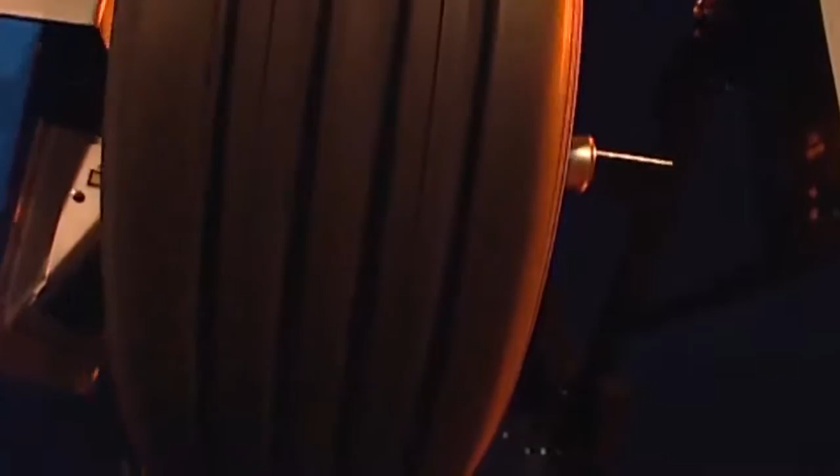A wheel balancer measures and corrects unbalance, but not runout of the wheels. This is what may be behind runout: runout of the rim, runout of the tyre, and/or runout of the tyre-rim assembly. The consequence? The car is far from running smoothly. Tyres wear out much faster. Driving safety might well be jeopardized, particularly when braking or cornering.

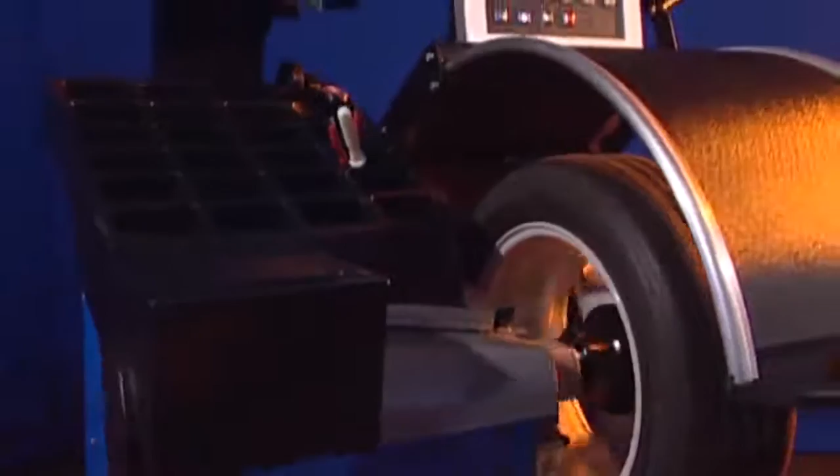The HOFMANN GEODYNA Optima is much more than a mere fully automatic wheel balancer. It is a diagnostic device with non-touch laser technology that is extremely convenient to operate. Alongside the standard features of unbalance measurement, the GEODYNA Optima also measures and corrects tyre and rim runout. Clamp the wheel on, close the wheel guard. That is all there is to it.

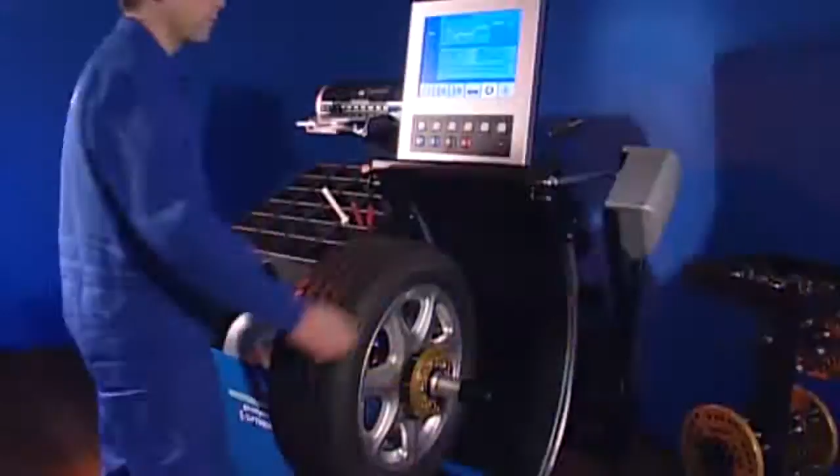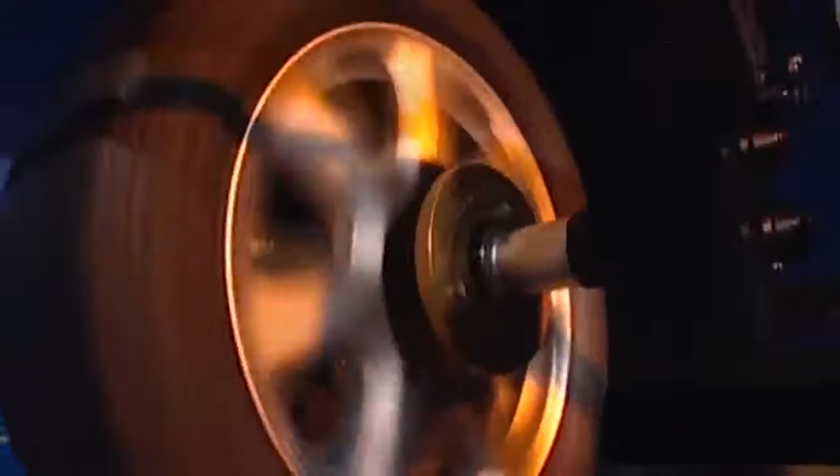All data, such as wheel dimensions, lateral and radial runout, number and position of spokes, and unbalance, are measured without the wheel having to be touched. The GEODYNA Optima increases productivity of the garage because it combines various work steps and consequently saves time. It adds to the professionalism and competence of the garage by diagnosing and remedying the ride problems of the car. Simply unique. GEODYNA Optima.

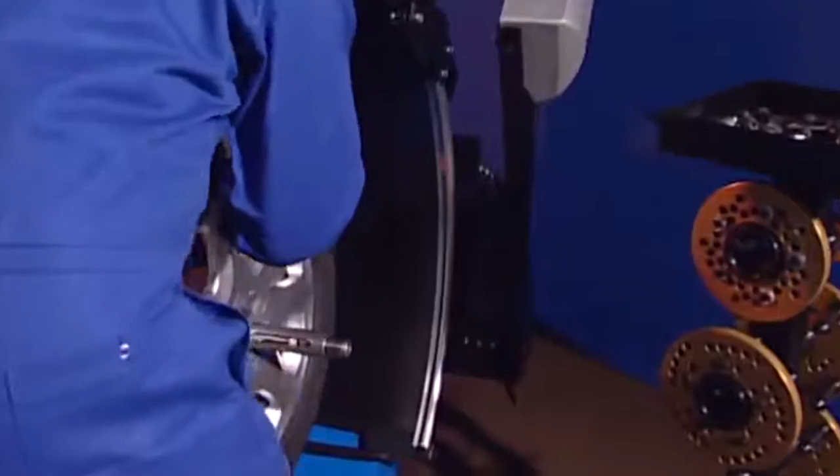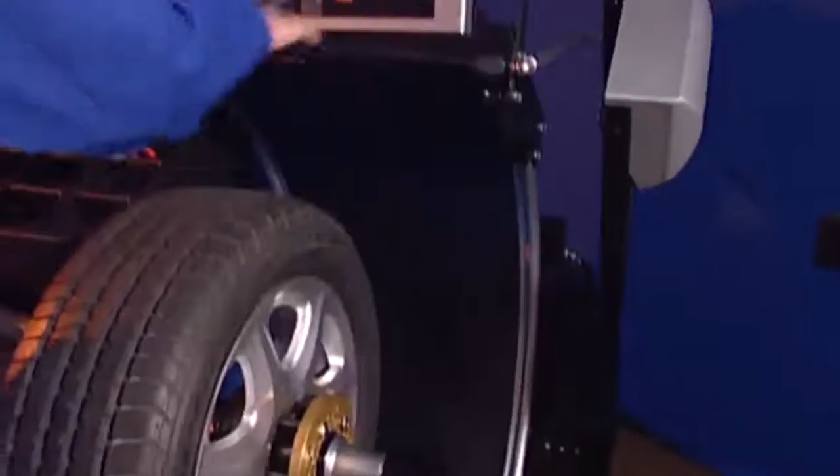The wheel is clamped onto the wheel balancer with the patented power clamp device, using a cone and a stud hole flange. The great benefit here is that the wheel is clamped on with maximum precision, an absolute must for any balancing operation. There are no more input errors, due to the fact that manual input of weight placement and wheel dimensions is a thing of the past.

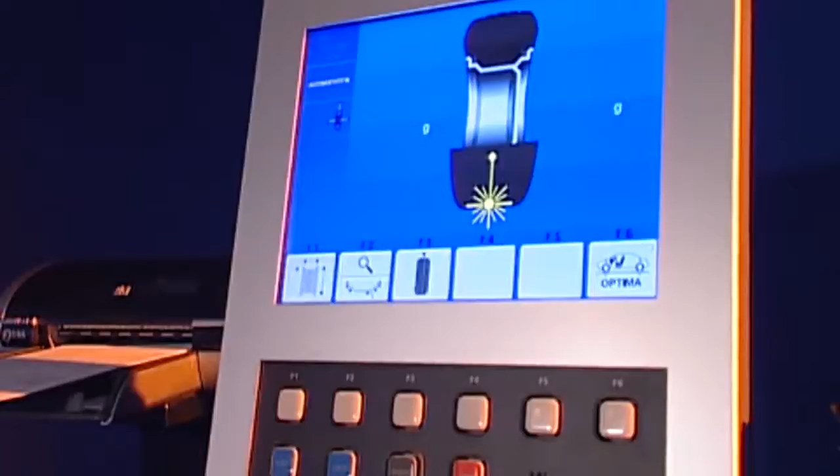The laser scanner first scans the inner rim contour with utmost precision to determine the offset, wheel diameter and weight position. Then it detects the position and the number of spokes. Afterwards, the wheel width is measured with a scan of the outer rim contour. Now the wheel data are complete. Finally, the rear scanner determines radial runout of the tyre-rim assembly.

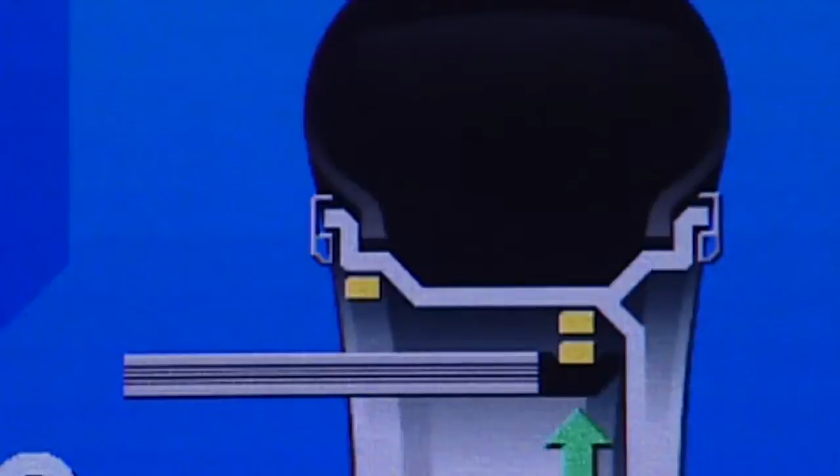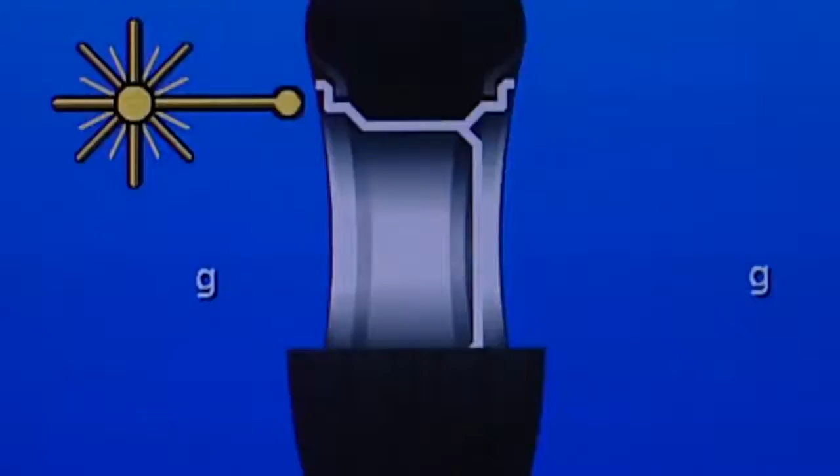If there is no indication of runout, the GEODYNA Optima will switch over automatically to the balancing screen. This enables the unbalance detected to be corrected. If, however, the preset threshold value for radial runout of the tyre-rim assembly has been exceeded, GEODYNA Optima becomes a diagnostic device. It automatically measures radial and lateral runout of the rim, clearly determining the cause of runout. This is what GEODYNA Optima alone can offer.

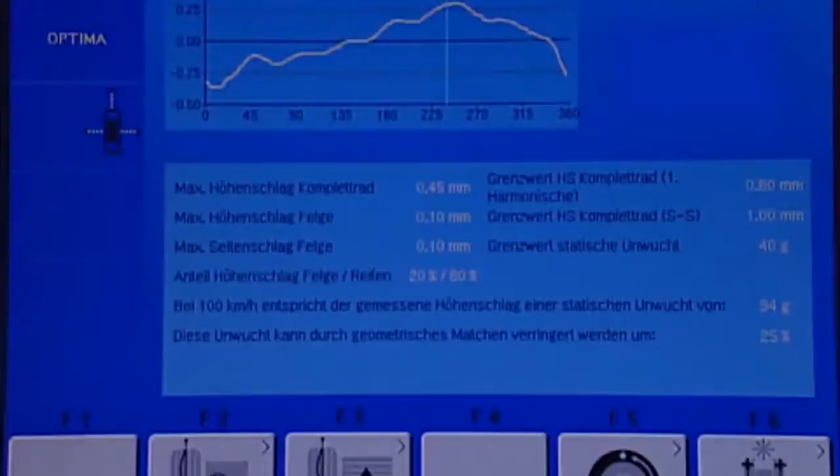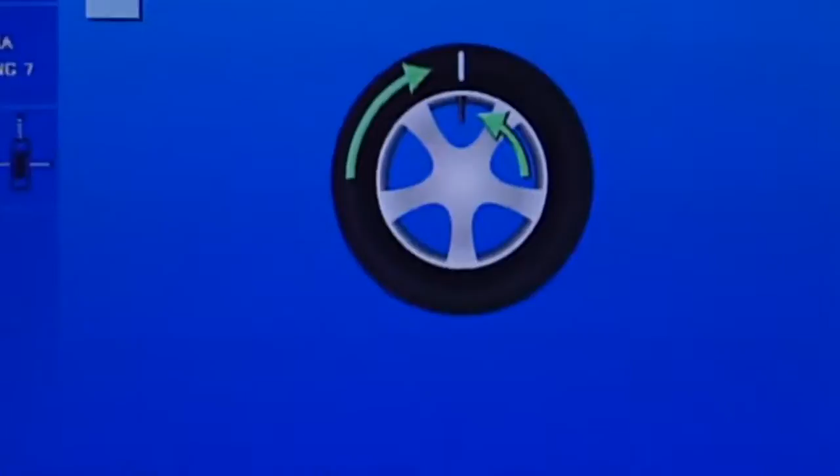Coming on automatically, here is the Optima screen with the graphics of radial runout and the radial runout values for the wheel and rim. Any improvement to ride is shown as a percentage. The operator is guided step by step through the easily understandable matching procedure, where the tyre is readjusted relative to the rim to compensate for runout and consequently to improve ride.

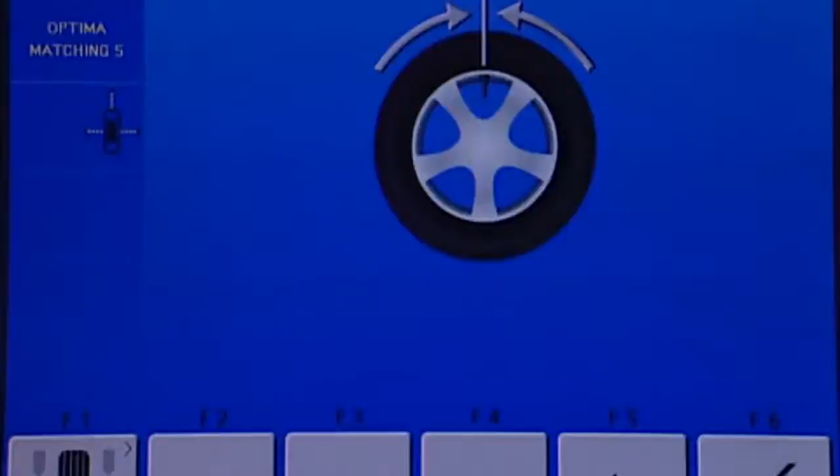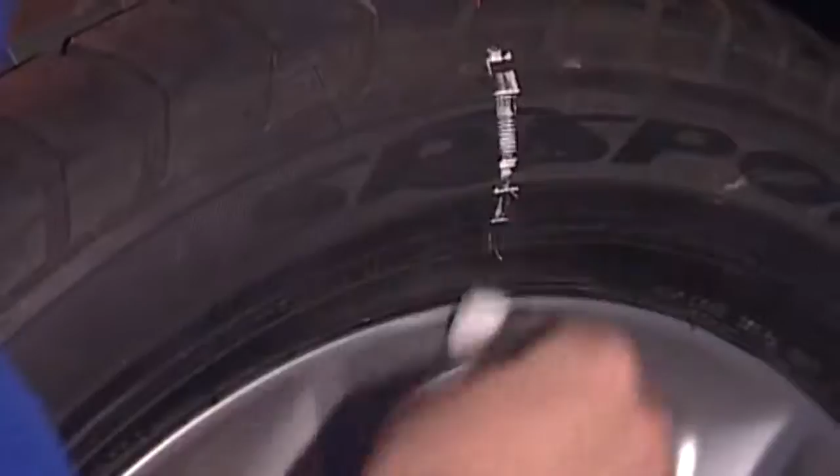First, turn the wheel valve to the 12 o'clock position and store this position by a simple key operation. Then rotate the wheel until the red arrows on the screen turn green and mark this position on the tyre with chalk in the 12 o'clock position. Now unclamp the wheel and on a tyre changer, turn the chalk mark on the tyre until it is level with the wheel valve. Now tyre and rim are optimally positioned to each other.

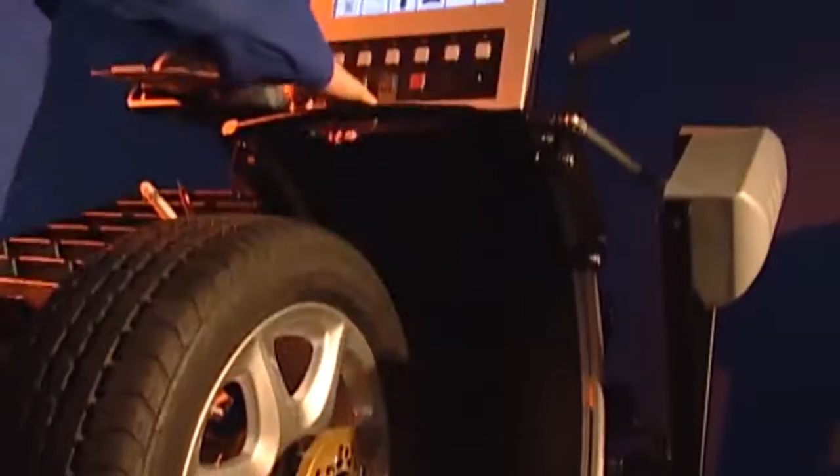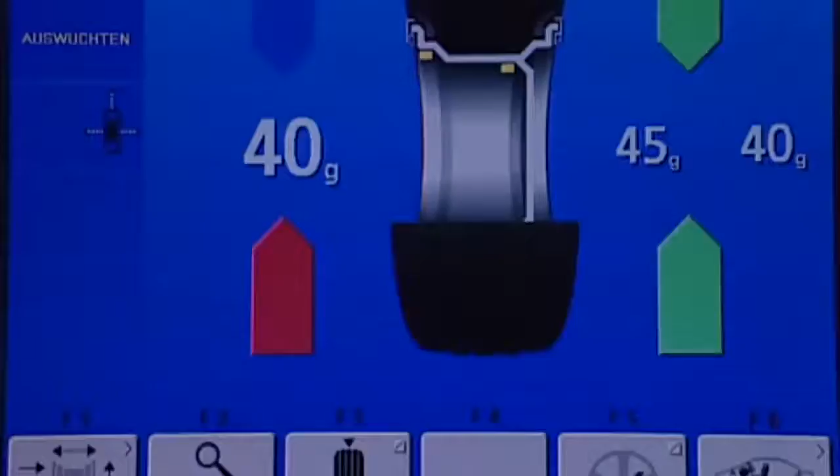The wheel is once again clamped onto the GEODYNA Optima. In a final measuring run, the unbalance is measured and corrected. Alloy rims mostly have spokes, so that adhesive weights may be visible from the outside. To avoid this, a simple key operation enables the weights to be divided up so that they can be positioned behind the spokes. In other words, one single key operation is sufficient to take care of this once complicated procedure.

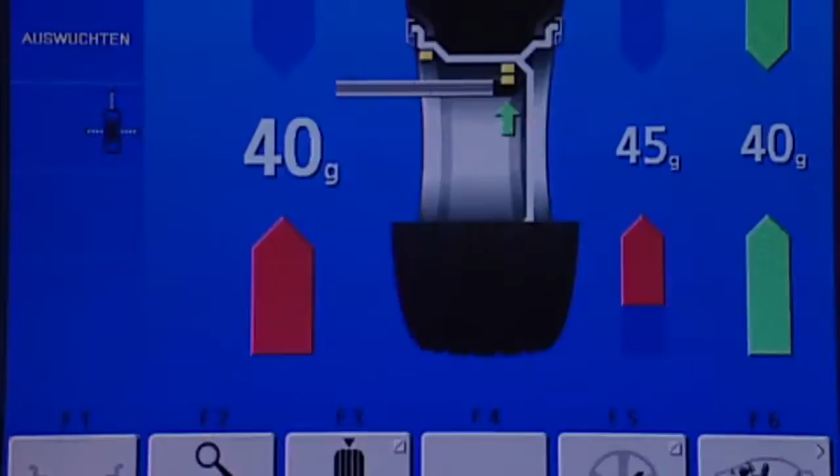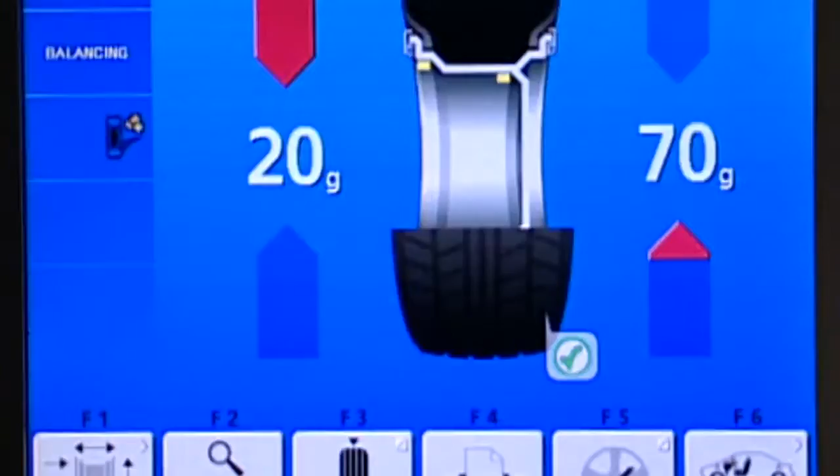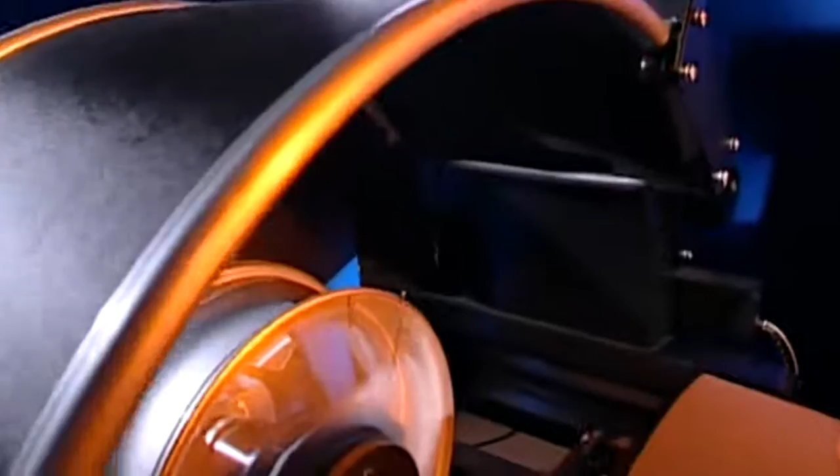During every measurement in Optima mode, the tyre tread depth is measured automatically. The screen shows whether tread depth is OK, critical or out of tolerance, based on a preset threshold. This is a good argument to sell new tyres. If a rim is clamped onto the GEODYNA Optima and measurement is started, the balancer automatically recognizes the radial runout of both bead seats and lateral runout of the rim.

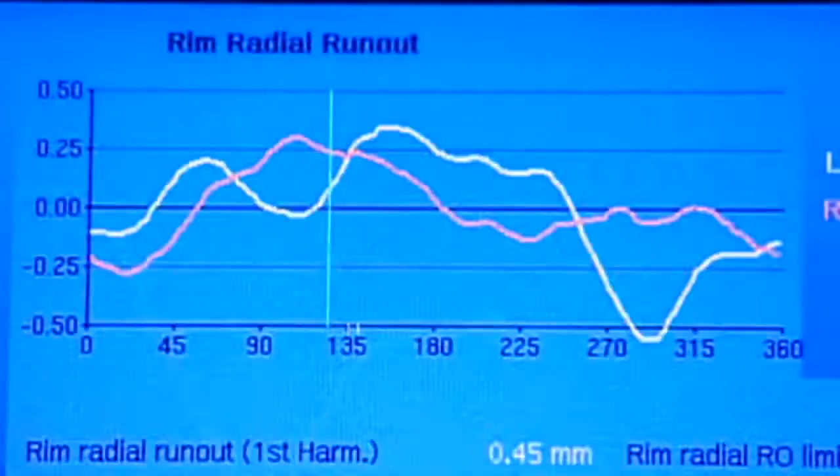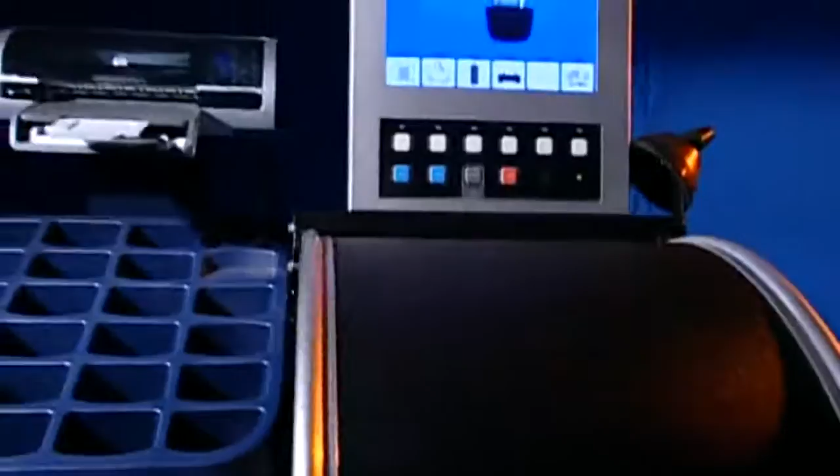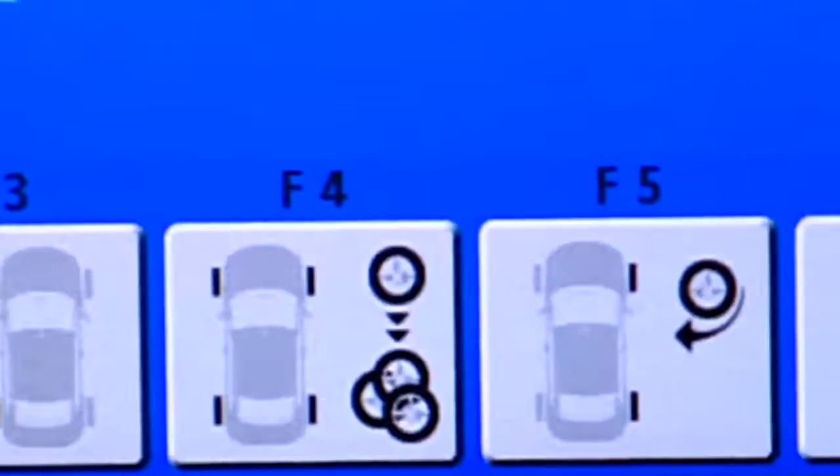Although wheel alignment had been accomplished on the car, it still pulls to one side. The cause often is conicity of the wheels. Here comes GEODYNA Optima with the features balance a set of wheels and optimization, where the data of up to 5 wheels are measured and stored. The rear laser scans the outer tyre surface. The Optima uses the scanned data to calculate the pull index, proposing the optimum position on the vehicle for every single wheel, so that the pull index on every axle is compensated for.

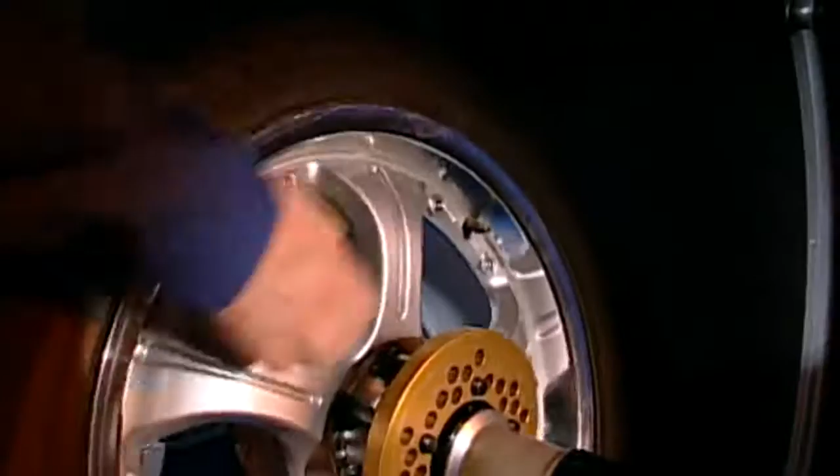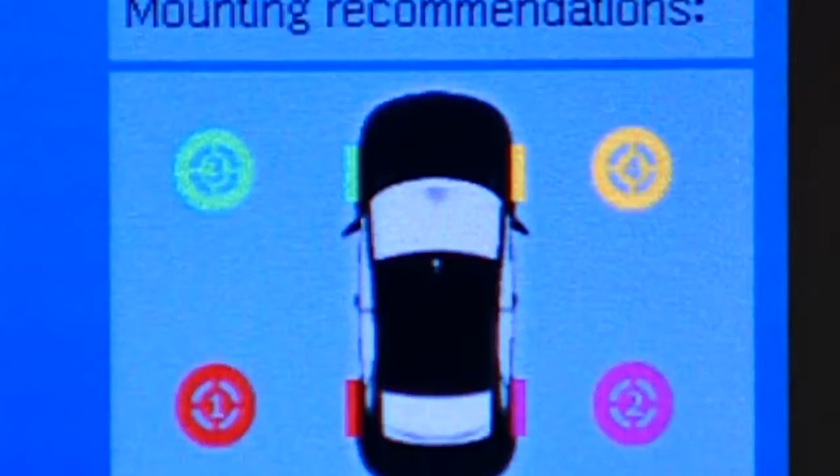Consequently, the wheels presenting the lowest pull index are assigned to the rear axle. If, however, steering wheel vibrations are to be reduced substantially, a simple key operation is enough to make the Optima propose the 2 wheels with the lowest radial runout for the front axle. Here is another benefit. The optional printer enables all the data to be handed over to customers straight away, the customers being more than satisfied.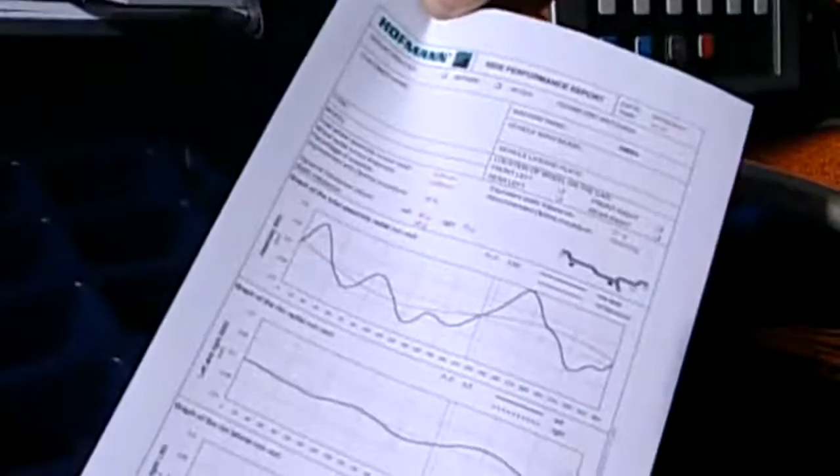With the HOFMANN GEODYNA Optima, the garage has a great deal more than a mere fully automatic wheel balancer. It is also a diagnostic device with non-touch laser technology and extremely convenient operation to satisfy the high expectations of your customers. The HOFMANN GEODYNA Optima, the one and only wheel balancing and diagnostic unit made by Snap-on.